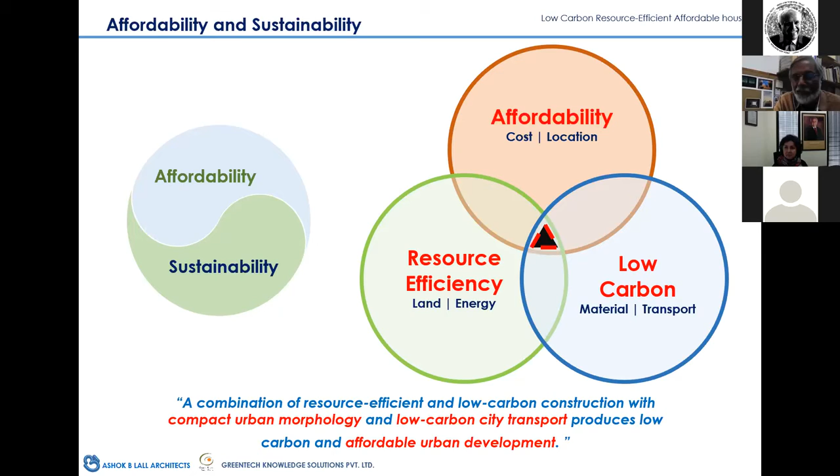Now in our research work, what we did was we just looked at what are the current trends of building. We find that in the cities, by and large, there are some places where people are building 4-story buildings for homes. They're building taller buildings, about 8 stories high. And then some places, in some cities, they are even building much taller, 12, 14, 20 stories high. They also think at the same time that this is the only way to go, and they think it will be affordable. So what we said was, well, that seems to be like an arithmetic solution. Can we not look at it more systematically? Let us look at real projects and evaluate them.

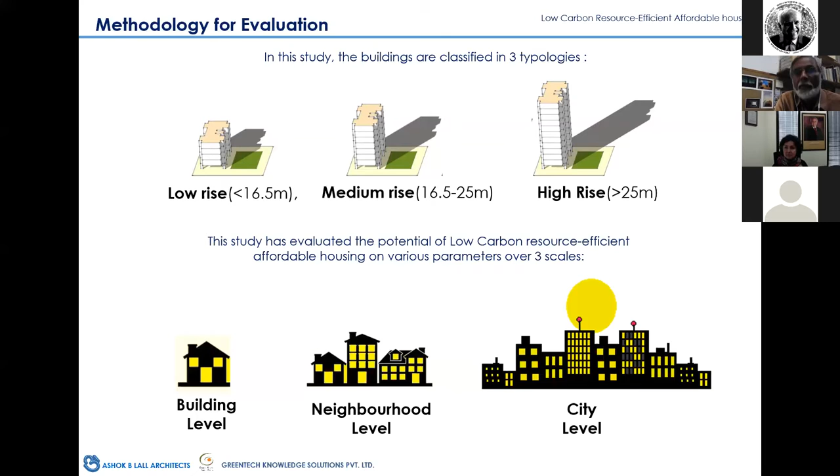Now, the first thing we looked at is the embodied energy efficiency of buildings. That means how much carbon dioxide you emit per square meter of usable housing space that you provide. So let's not look at the specifics of the numbers, but let us look at them comparatively.

You have 233 units consumed per square meter in a low-rise building, G+3. When that goes up to G+7, you are now consuming 251 units, in other words emitting 251 units of carbon dioxide. And if you go taller still, see the jump? You go up and start consuming 310 units.

So even when you give the same walling material, the taller buildings have greater CO2 emissions because of the high quantity of steel and cement that you're using in them. As you go from low rise to mid rise to high rise, you jump by 15% and then eventually to 35% embodied energy. So, that is the structural part of it.

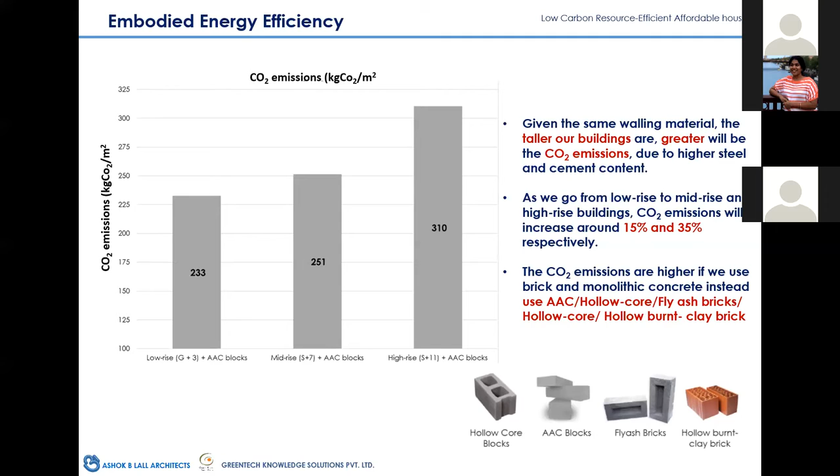But even in the building materials, especially walling materials, there are now options available where low embodied energy materials can be brought in for walling. But this is to say that if we are going to build a large number of homes across the country...

They say we have yet to build, we have not even built 25% of our requirement of homes. So we have yet to build 75% of our homes in the next 2 decades. If that much you're going to build in 2 decades, and in the construction itself you're going to incur 35% more carbon dioxide emissions simply because you've chosen to go high rise, then are you honoring your sustainable development goals? Are you honoring your climate change promise, your climate fighting promise? You're not, you're going away from it. So here's a fundamental error in policy today, which we discovered in this project, only on account of embodied energy.

But then you live in buildings, and the buildings will last for 50 to 70 years. And then you must consider the operational energy efficiency of buildings. Now, what is it that you consume in the buildings? Where is the difference between low rise, mid rise, and high rise? It's in the lifts and pumps principally, in the common spaces and the lifts and pumps. That's where the difference occurs.

So if you've got a 4-story high building, no lift, hardly a pump, right? The main municipal supply gives you sufficient pressure to rise up to the top of the building. The moment you go mid-rise, you have to install lift, you have to install pumps. You go high-rise, even more so. And you can see the kilowatt hours per dwelling unit that you're consuming. Just compare the numbers: from 59 to 278, 5 times more.

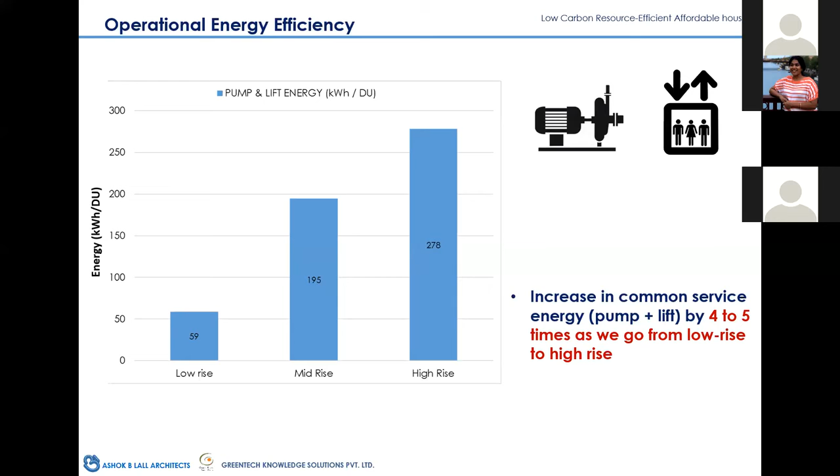So if you're building high-rise, are you doing the right thing by climate change, by incurring much more energy just to live in those buildings, to go up and down? Obviously not.

And of course, all of this costs. Even the construction cost goes up as you go higher. But maintenance cost is a very significant thing. Now, this is real calculation, just look at the difference. 4-story high buildings are very easy to maintain, hardly any mechanical equipment, easy to maintain the outside face of the building, easy to replace windows if you have to do that.

Mid-rise has more electromechanical equipment, firefighting equipment has now come in. That's a cost. Lifts have to be replaced every 10 years by law. High-rise buildings, even worse. Imagine having to service the outer surface of a high-rise building when it's beginning to crumble, especially those built with all concrete. It's going to crumble in 15 to 20 years. How are you going to maintain it? It's going to cost you a bomb.

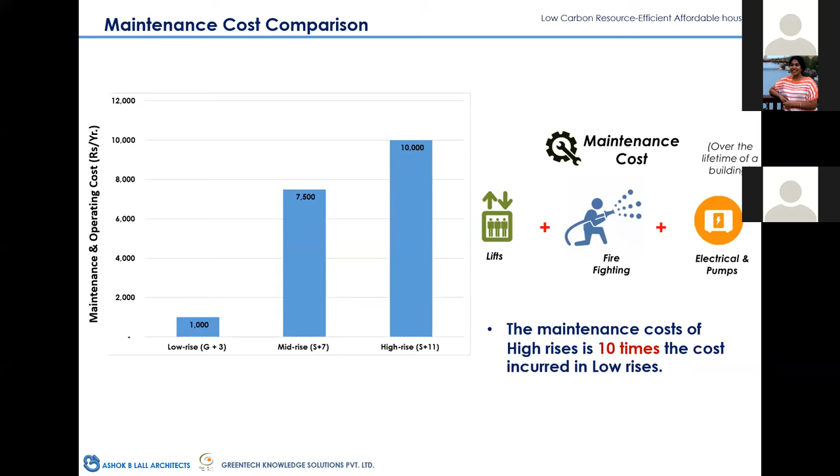So this is what we are seeing here. This is research. And you know, this one called rooftop solar potential. I tell you, this was a real find in this research work, a real find. What we see is that...

80% of the energy requirement in a low-rise residential building can be met by rooftop solar energy for simple living, not air conditioned. So low-rise buildings now have the potential of net zero due to the better rooftop area to electricity demand ratio.

Now, when you go to mid-rise, that potential has dropped to 47%. It was 83% when we had four-story, five-story buildings. You go to mid-rise, you're already down to 47%. You go to high-rise, of course you'll come down to 31%. But there's another price to pay: whereas the low-rise building clears the treetop and the roof has access to the sky and the sun, it can capture all the energy available from the sun.

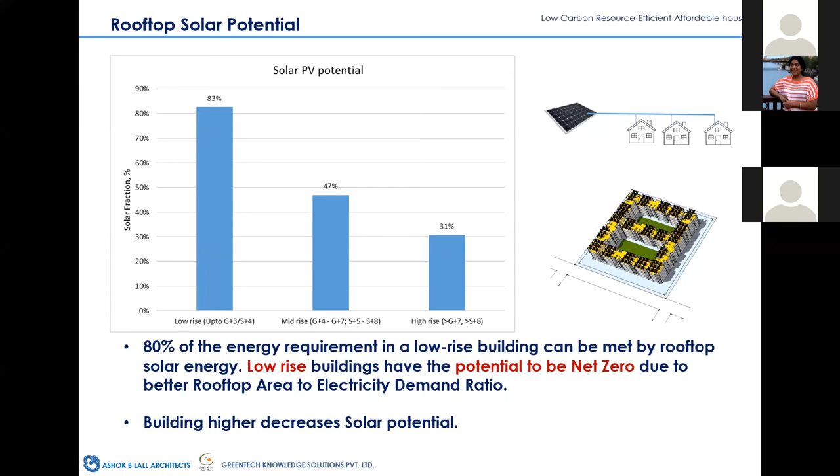The moment you go taller, you start overshadowing your neighbor. The taller buildings will overshadow the other neighbor, and so on. So you suffer on two accounts: you're reducing your own rooftop solar potential, and you're also denying rooftop solar potential to your neighbors who are only 4 or 5 stories high. This is a very important finding from a planning point of view. If we are talking about solar cities in the future, this is something to be remembered.

This is something we've all done in our climatology courses, but no harm in repeating a few things. If you're designing a building, you must design it for thermal comfort. Why? Because if our incomes grow, and if we are already enjoying air-conditioned comfort in our motor cars, or in the cinema, or in the restaurant, or in the train, we expect to get better comfort in our homes. Very soon, if we can afford it, we will start putting in air conditioners, as we have started doing.

If you look at the statistics of growth in split unit air conditioning trade across India, it is growing. The graph looks like the hockey curve of climate change, going very steeply up. Now, air conditioning is very highly consumptive of electricity. It is the largest component of CO2 emissions because of energy consumption in our buildings. So we have to design our homes in such a way that the demand for air conditioning, even if it is there, is minimized, so that you install smaller units and use them for less time.

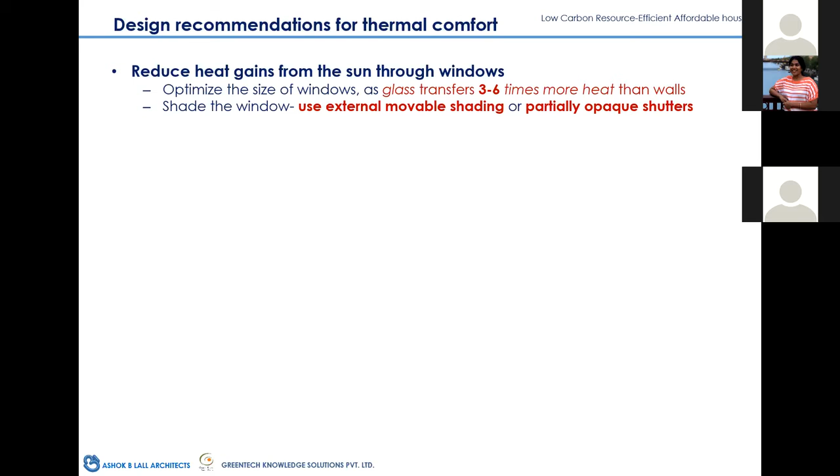I've been seeing on the internet so many examples and lifestyle statements about views and transparency and modernity.

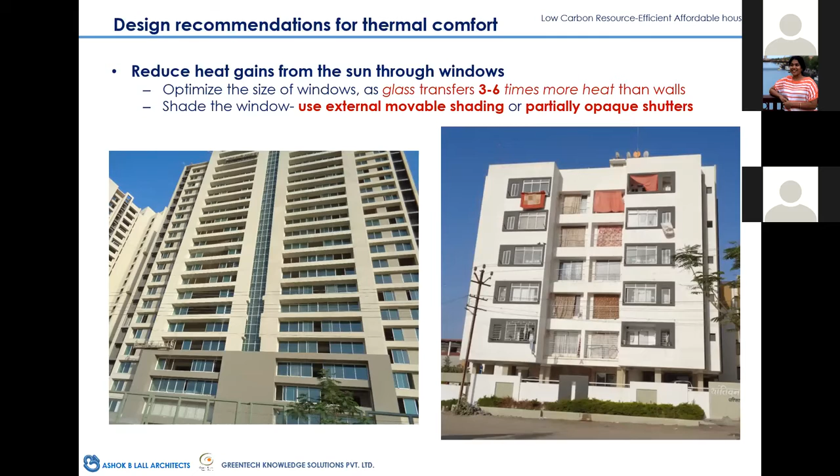Look at this and look at what the residents actually have to suffer. They realize that they got it wrong. And you know what, it's a very sad thing—when you ask the residents what's the problem, they say, bahut garmi hai, it's so hot. You know what to do? They don't blame the designer, they don't blame the developer, they don't blame the architect. Actually, that's where the blame lies—with the developer and the architect, leading you up the wrong path and then making you suffer.

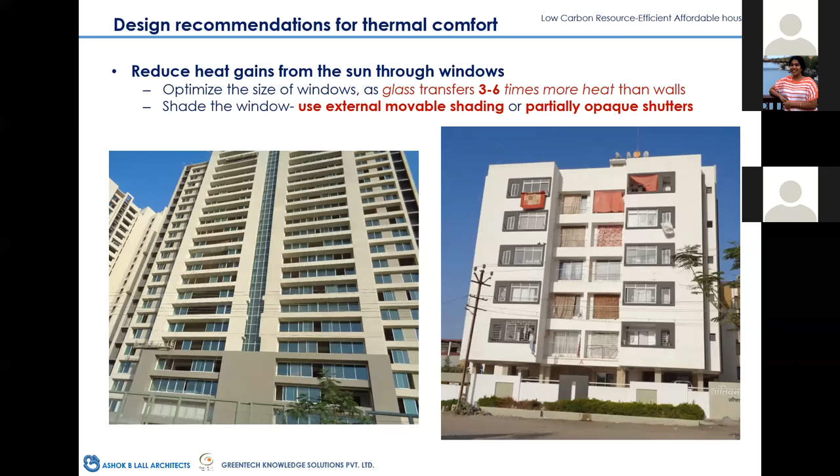That's what's happening. So you must reduce the size of windows, shade them well, and preferably use external movable shading systems. There are simple ways of doing this, many examples of how you can do it—just provide a frame.

This window on the right-hand side has been done in a low-cost housing project in Rajkot, where they decided to be very sustainable. They found that when it is pleasant and nice outside, you open the window, and when it is blazing hot and sunny outside, you shut the window. It's very bright outside, so the lower part of the window shutter is opaque—only the upper part is transparent. So you get enough light when you shut the window during the blazing hot part of the day, and when it is pleasant, you open it for more light and good ventilation. Very clever, simple, affordable design there.

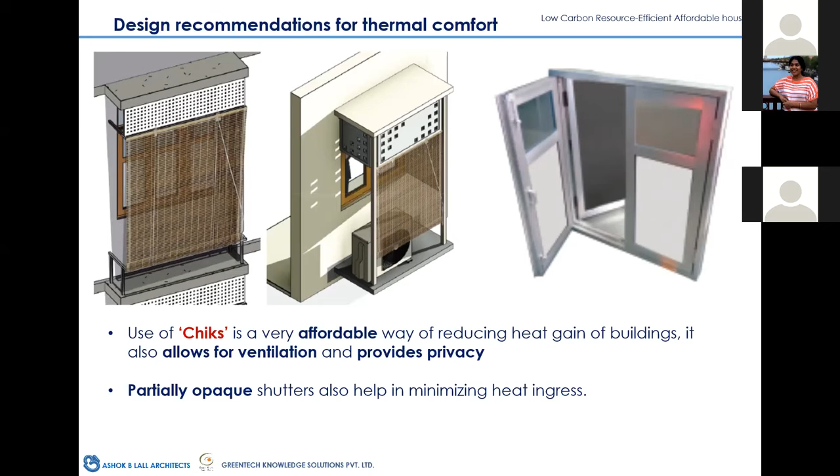Of course, the roof has to be well insulated and must have a reflective surface. That's extremely important. I don't know why builders say, oh, it costs more—as if the life of people living on the top floor is less valuable. How the hell can you ever say that? What makes you even think like this? I can't believe it. And what makes us designers, I don't know, unki minnat karte hain—please listen to us, no, it doesn't cost more. I said, if it costs more, it's the right thing to do. The people living under the roof deserve the same level of comfort as those living below them. You have to do the right kind of roof for anybody to live, no matter how low cost the solution—it just has to be done.

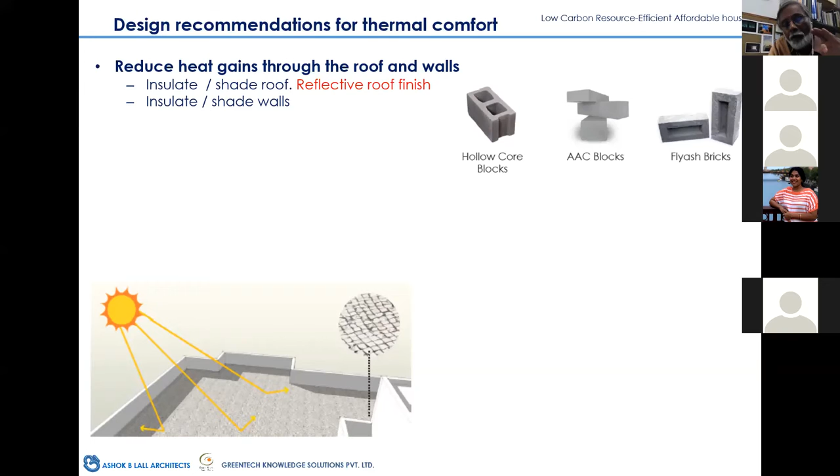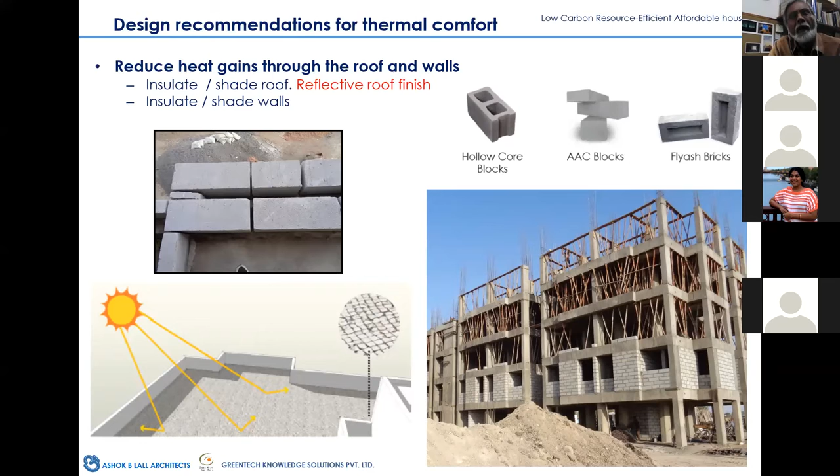Again, in this Rajkot project, they did it, and you can measure how effective it is—insulated walls and properly done roofs. Here's another one.

Evenings are often pleasant, right? There are many seasons where it is pleasant outside. First, of course, you must take care of pollution. If you've taken care of pollution, it's pleasant outside, it's very nice.

You open the window. Why do you open the window? Because you want the benefit of the cool air outside. But how will the cool air go through your house, unless it can go through and across your house? And you must design for cross ventilation.

And a lot of builders, once again, they will refuse to design for cross ventilation because they say that residents are very worried about security, and they don't want this, and they want privacy, and they want this. Boy, that is a design problem. Cross ventilation is a must and we have to find solutions for that. And they exist.

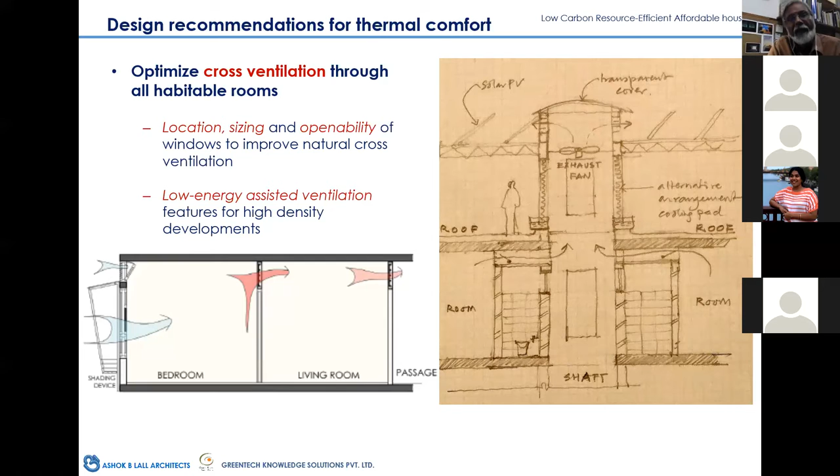Okay, now let's move on to something else, which is very important. When your homes are small, it doesn't mean that your families are small. When your homes are small, your families are just as big, 4, 5, 6 people in a home. And you get very crowded in.

Just to think that all of us between the age of 6 or 8 and 22 will spend time inside the house. No way. We'll be running around outside. We'll be meeting our friends. We'll be going outside. That little room is not good enough for us. It won't do. We have to go out.

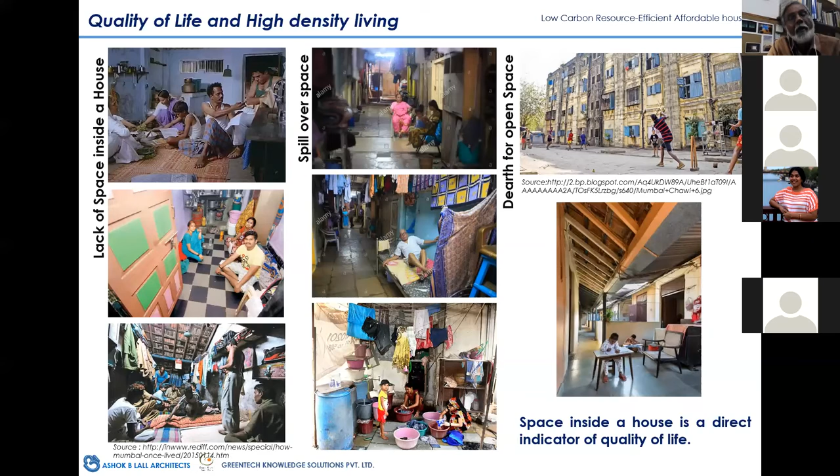So what it suggests is that for affordable housing, outdoor spaces, terraces, balconies, close to the homes are extremely important. They are part of the making of the home. The outdoor livability is as much a part of provision of the home. And that's extremely important. Of course, when you have small homes, you have only 6 meters per person.

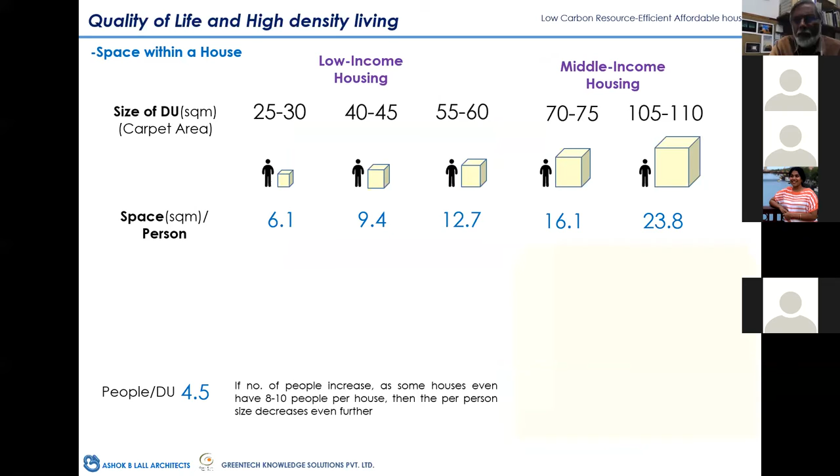And when you have large homes like 105 square meters, you have 23 meters per person. Yes, then it's okay. In one room you can have the TV, in another room you can have the computers, and you can have an exercise machine somewhere else. But if you're talking about small homes, 25 to 50 square meters, no, you'll need space outside. You have to give complementary open spaces outside.

And once again, what it shows is that if you build 4 stories high, where the street is accessible, you can have a few balconies, and the rooftop is a replacement of the ground that you can use. And above the rooftop, you can build a frame where the solar panels can come in the future. So once again, the livability of a 4-story high building is much greater than a taller building. The livability, sheer livability, especially for small homes.

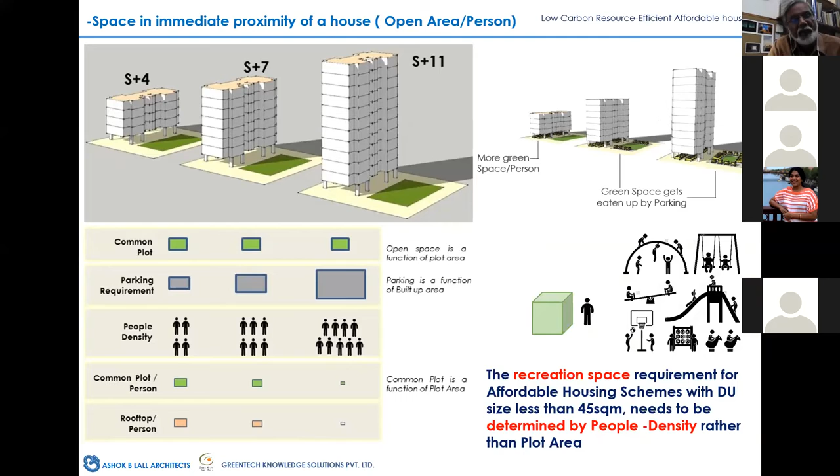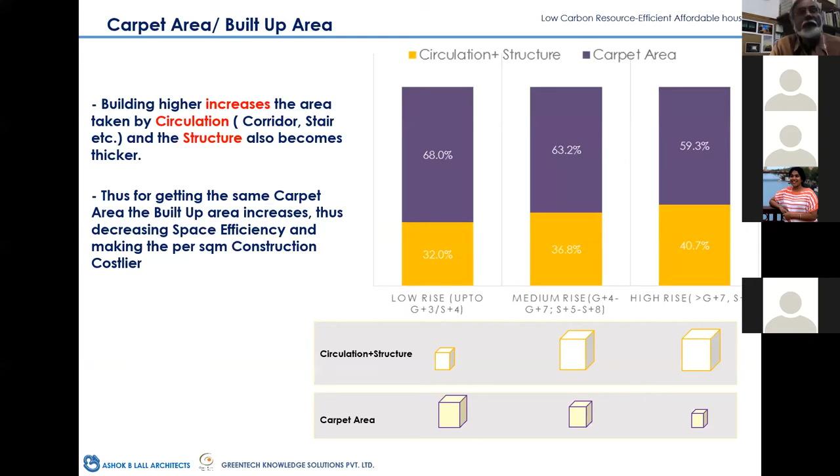Economics. Well, as you go taller, the structure gets heavier, more space is given to staircases and lifts, and therefore it costs you more to provide the same amount of livable space as you go taller and taller. This is common sense. But now when you do a summary of it all, what do you say? Here are the criteria that we looked at when we compared the 3 types of building. All in the name of affordable housing, mind you. All these 3 types of building are in the name of affordable housing.

Open area per person, which gives you most? The low-rise building. Embodied energy efficiency, low-rise is the clear winner. Operational energy, low-rise is the clear winner. Solar roof potential, extremely important. Low-rise is the clear winner. Carpet area per built-up area, low-rise again. Construction cost, affordability, low-rise. Quick time in construction, low-rise. Maintenance affordability, low-rise.

And what happens if you have a disaster? The bijli fails and you have to go down to fetch the water. Would you live in a 4-story building or a 10-story building on the top floor? Where would you like to live? What if there's a fire? What if there's an earthquake? Which do you think is the more resilient form of living?

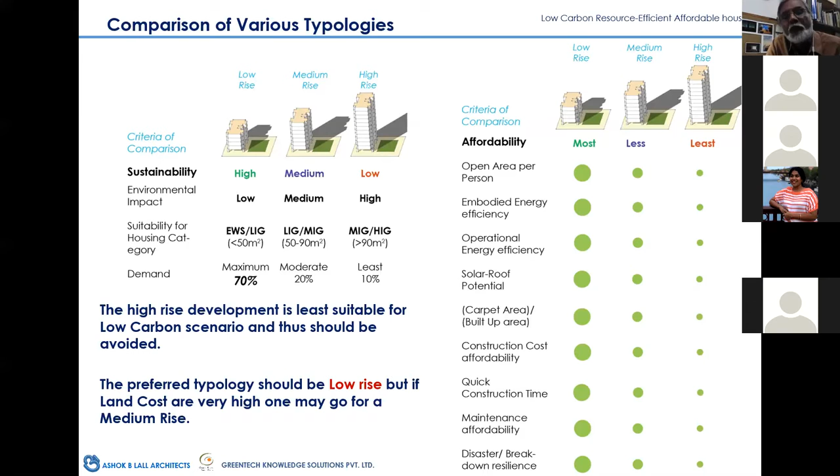The 4-story, compact, high-density form of living is the resilient city. That is the resilient city. And the research establishes it without any doubt whatsoever. Planners, please listen. And you can extend the argument to the neighborhood level.

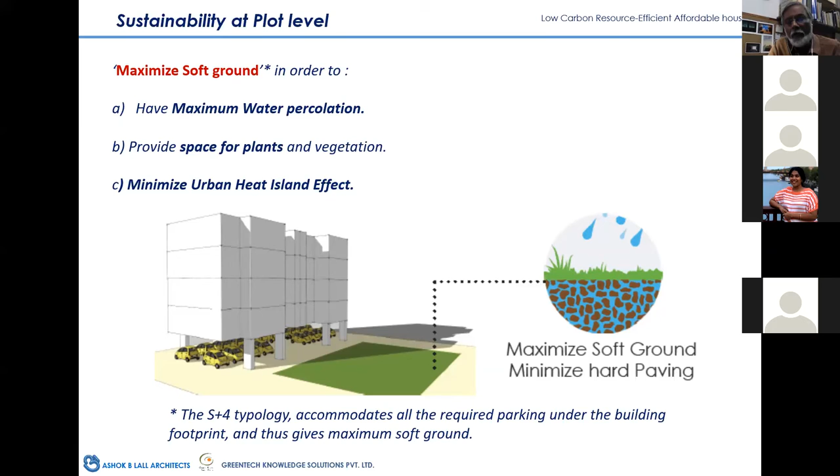I'll now go through this a little bit more quickly, because we also found that if you did have some parking space, which you must deal with in a different sort of way at a planning level, the provision of motor car and mobility, etc., at a planning level, tuck it under the building, leave the open ground as soft ground as much as possible. And don't waste land in setbacks.

The wider the street, the wider the setback. What the hell for? That's not what makes streets. Streets are pavements and shops. Streets are life on the street. Reduce that front margin. Reduce the requirement of fire tenders asking for 6, 7, 8 meters width to go around every single building. Develop some other ways of finding fire safety, especially if you've got 4, 5 stories high.

Make it simple. Gain more land through your planning rules. Present planning therefore reduces the potential of high density and increases the cost of densification.

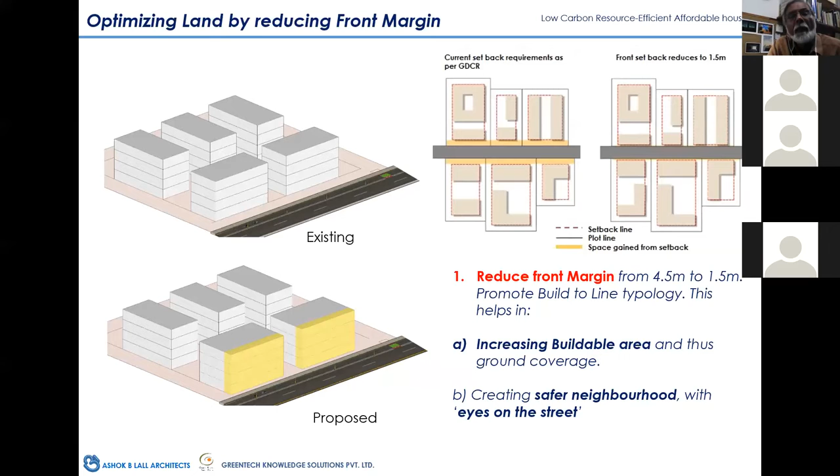And of course, you mentioned this earlier, mixed use and pedestrian friendliness. Even today, mixed use is not being accepted in many parts of the country. It is the natural consequence of natural city life. We've seen it through the ages. We've seen it across the world.

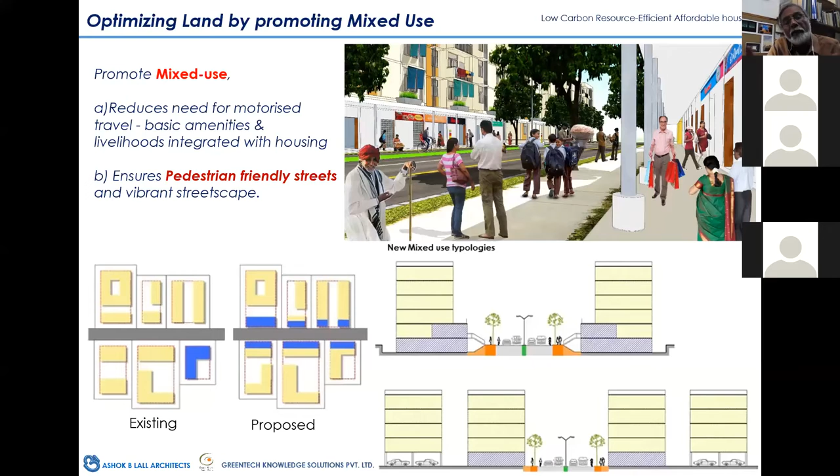We are stuck to something that was developed in Great Britain in the 1950s, the segregation of uses. We're stuck to it for no good reason. And then we penalize people who live according to the nature of the city. You say, no, this is not allowed here. Instead of finding a via media where you allow a certain amount of mixed use in a structured manner. So you have the shops that face the street and homes that face the courtyard or the garden. A simple way of achieving it.

And I think these are well-established principles in urban planning, but I'm afraid, I don't know why, our master plans, our urban planners, our urban management ministries don't take these principles seriously. You have to locate the maximum affordable housing within 500 meters of mass transit. They have to be within 200 meters from major roads where they can catch public transport. You have to reserve and find lands for affordable housing in those locations.

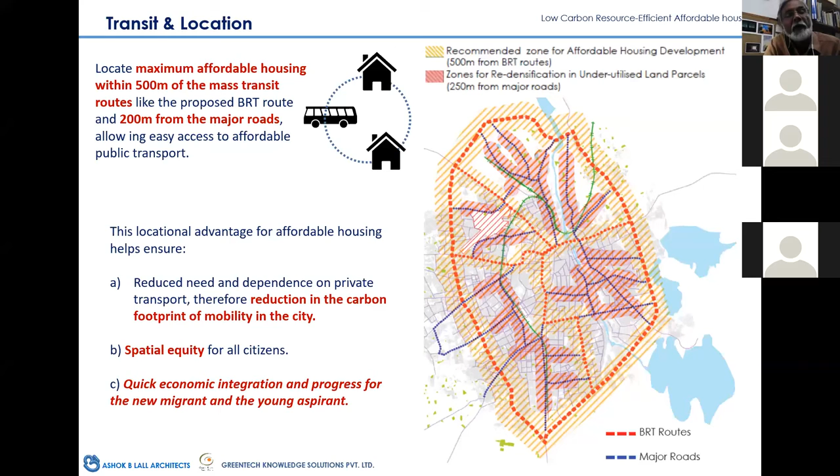And this way of planning of affordable housing serves the first objective of the Sustainable Development Goals, which is to say that you have to develop for equity, for giving the poorest in your society, amongst your community, of your citizens, the quickest route to integration in the progress of your city. It is the quickest economic integration and progress for the new migrant and the young aspirant who's coming to the city if they are properly located close to transportation infrastructure where they can avail public transport and close to places of employment and the city infrastructure.

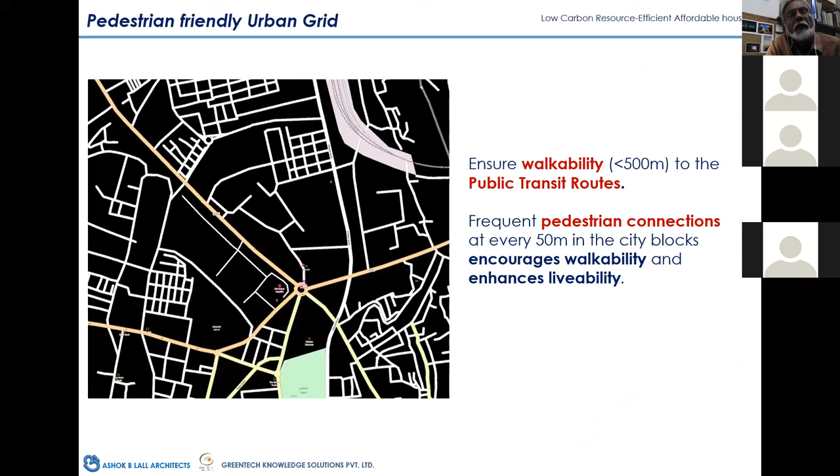Walkability is a must. Gosh, to find a bus stop from certain streets, I have to go around the whole block, travel long distances. Planning regulations should allow pedestrian routes crisscrossing through large properties. This must be law. Despite the concerns for security and all that, I think it's really a design issue. And if you have better walkability, you will have less dependence on motorized transport.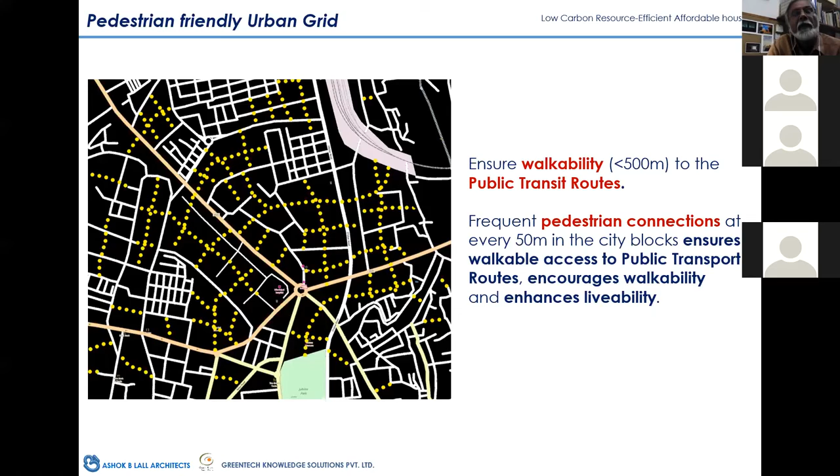Simply because it is inconvenient to reach a close-by destination, there's a tendency for me to jump onto my two-wheeler and go around the block to just buy some vegetables or shampoo or medicines. But this network needs to be incorporated in the cities as the first principle. Okay, we did make some recommendations to the government of Gujarat, but I'm afraid nobody is taking it as seriously as they should. And it's my appeal to all our audience that this is the burning issue of urbanization and urban development.

And also, because your projects are smaller grain, relatively smaller, many more small contractors can participate in the economic activity of building. Today, unfortunately, at the top of our government, there is a belief that the big machine that will come from Turkey or Mexico or Singapore or somewhere will produce millions of homes quickly and fast. And that is how we'll provide affordable housing.

I tell you, that's not only not going to provide affordable housing, it's going to provide expensive housing, which would not be truly affordable. It's going to suck money to the top of the income pyramid without distributing money to all those who today, because of COVID, are unemployed and looking for work immediately. So this is the DNA for a sustainable urban future. Low rise, high density. Thank you very much.